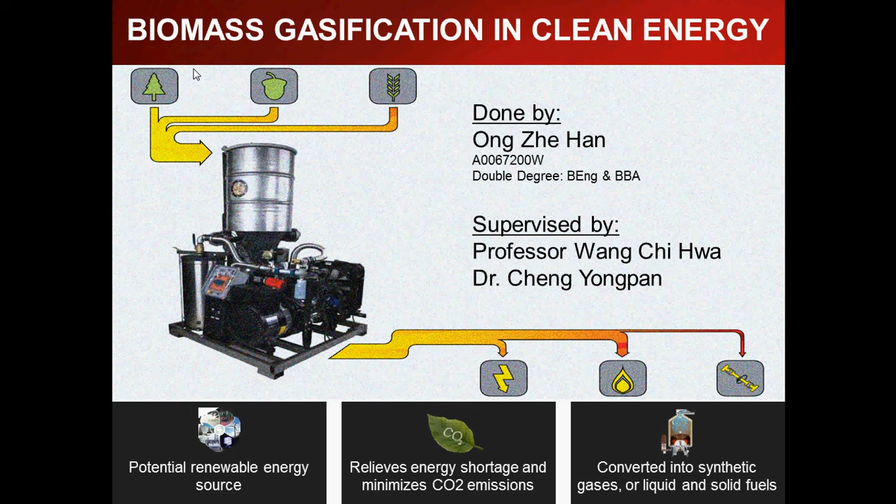I've segmented my presentation into four separate parts: the introduction, a literature review, my tentative plan, as well as an overall look at my proposed schedule for the upcoming few months.

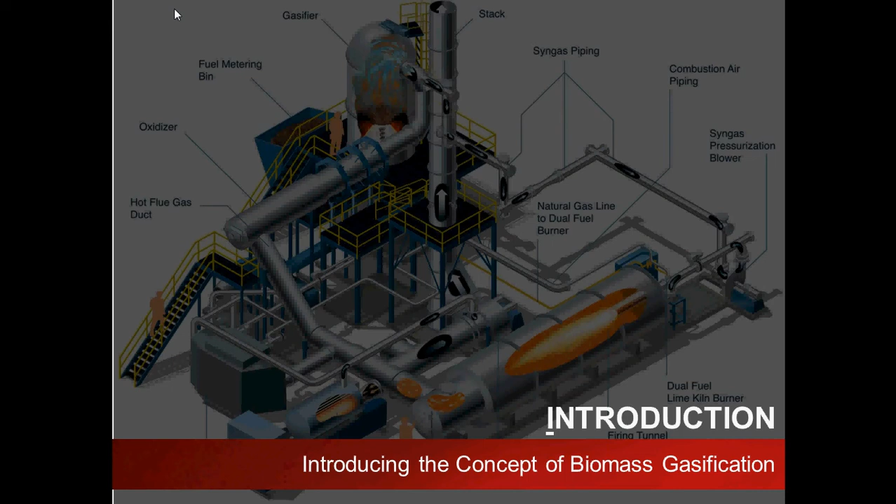Without further ado, I shall now proceed to the introduction, which will hopefully give everyone listening in an eye-opener into the concept of biomass gasification. In this introduction, I hope to answer three main questions that I think will be of great importance to anybody who comes into first contact with the concept of biomass gasification.

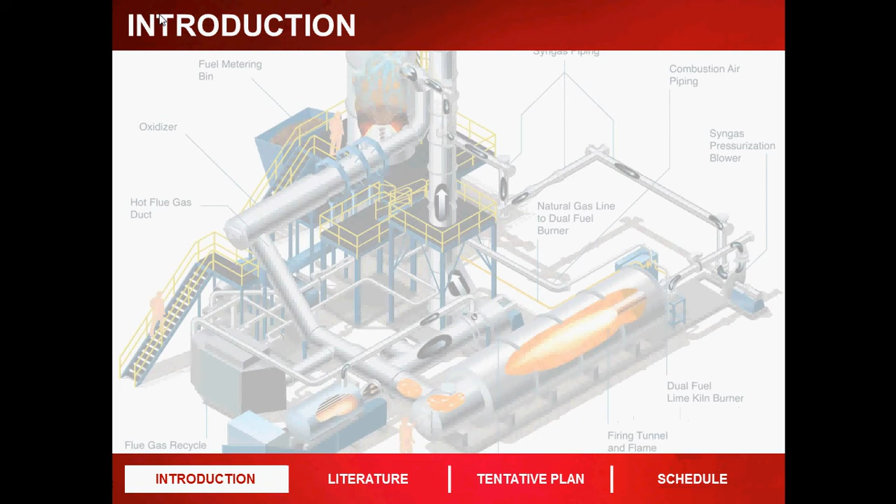Firstly, I would like to tackle the issue of what is biomass gasification. This will be followed by attempting to explain the promise that biomass gasification holds, before proceeding to give a short introduction of how biomass gasification works.

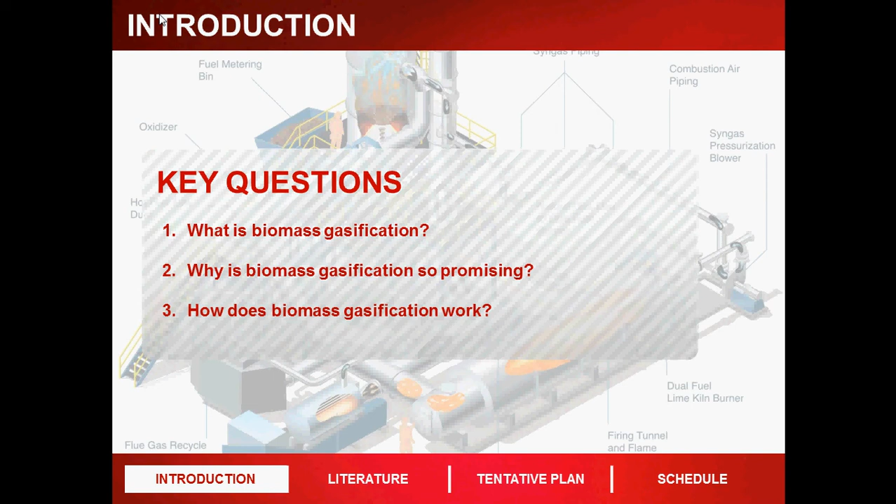So what is biomass gasification? In the hierarchy of biomass conversion processes, there exist two main conversion pathways: bioconversion as well as thermal conversion. The bioconversion, or wet process, is witnessed in natural phenomena such as digestion to produce methane, fermentation and distillation to produce ethanol, as well as extraction processes to produce rubbers and chemicals such as rubber resins.

On the other hand, thermal conversions, also known as the dry conversion process, involve four main types: liquefaction, combustion, pyrolysis, and finally gasification. Specifically, gasification is a process that converts organic or fossil-based carbonaceous materials into carbon monoxide, hydrogen, carbon dioxide, and etc. This is achieved by reacting the materials at high temperatures, often above 700 degrees Celsius, without combustion, with a controlled amount of oxygen and steam.

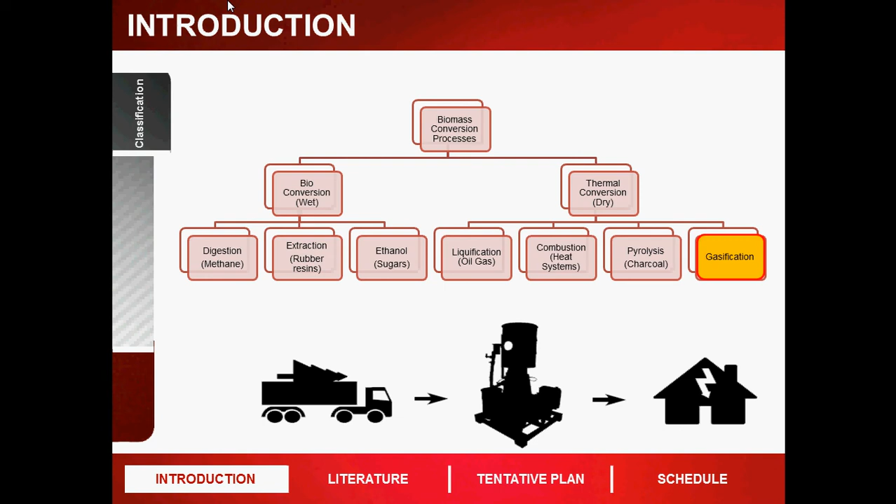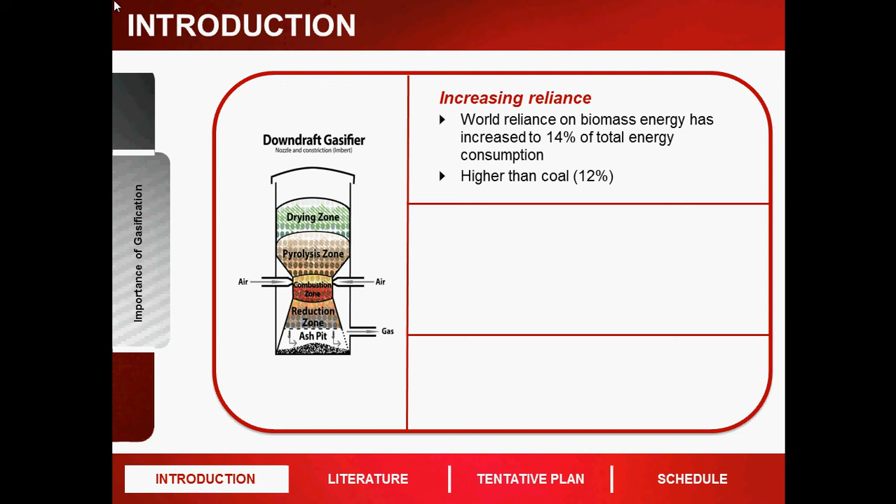Gasification has become increasingly important due to its many advantages. Firstly, much of the world has started to grow on this process that has been around for more than 1,000 years. Currently, world reliance on biomass energy has increased to 14% of total energy consumption.

Secondly, many industrialized countries are reconsidering the involvement of biomass in their energy systems due mainly to its carbon dioxide neutrality and renewable nature. Biomass energy is derived from plant sources such as wood from natural forests, waste from agriculture and forestry processes, and etc.

It's a natural process that all biomass ultimately decomposes to its molecules with the release of heat. The combustion of biomass imitates this natural process, so the energy obtained from biomass is a form of renewable energy, and it does not add carbon dioxide to the environment, in contrast to fossil fuels.

Lastly, it competes well with fossil fuels because it is renewable, and with soft energies like solar and wind on account of its energy storage capabilities.

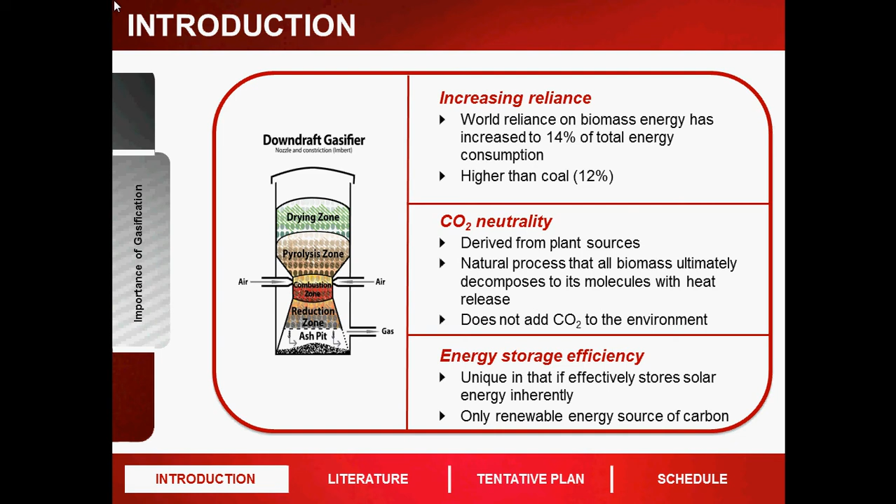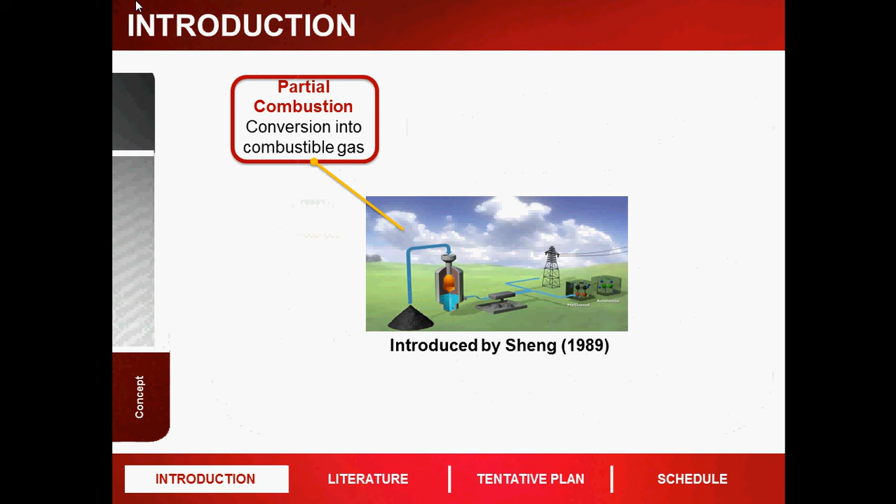Moving forward, the concept of what gasification really entails should be touched upon. Gasification is a process of conversion of solid carbonaceous fuels into combustible gas by partial combustion. The resulting gas, known as producer gas, is a mixture of carbon monoxide, hydrogen, methane, carbon dioxide, and nitrogen. The producer gas is more versatile in its use than the original solid biomass.

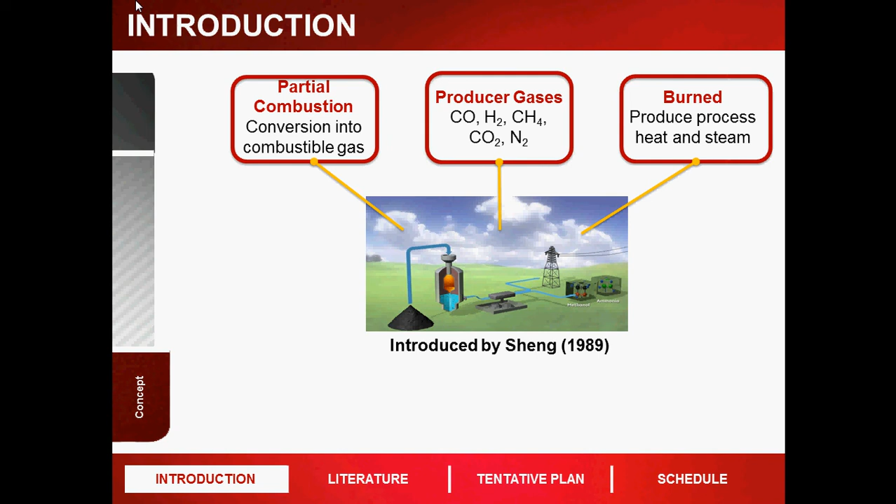It is burnt to produce heat and steam to be used in gas turbines to produce electricity. In short, this process takes in unusable or low-value wastes to produce a high calorific value gas.

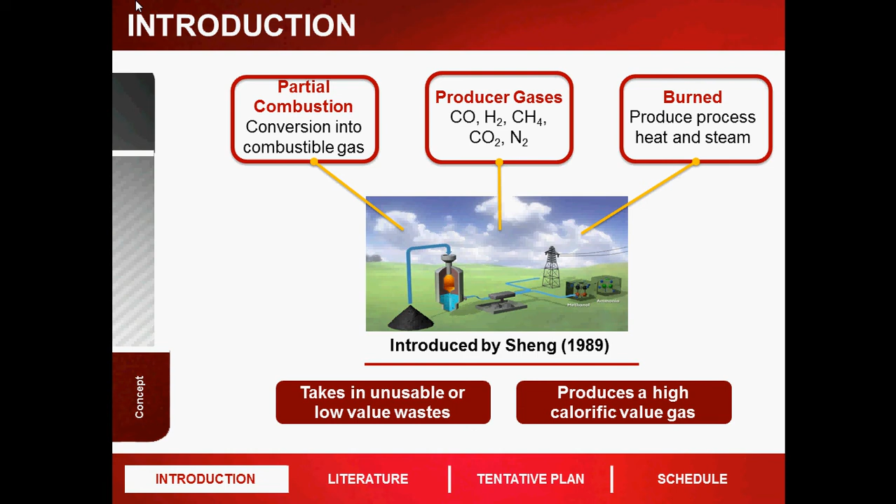In the course of this introduction, I raised at the start that we would like to answer the three questions of what, why, and how. To recap, biomass gasification is a thermochemical conversion process, a dry process that converts solid waste fuel into high calorific producer gases.

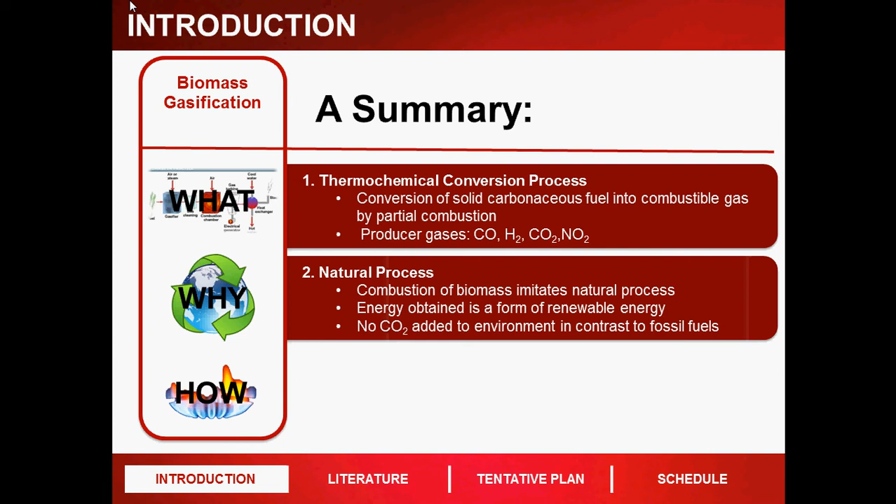It is precisely useful because of its carbon neutrality, owing to its close imitation of natural bioconversion processes. Lastly, we burn these producer gases to produce heat and steam, producing electricity through the running of gas turbines.

So moving forward, I've also conducted a literature review on the topic to gain some further insights and glean off what other respective scholars around the world have published.

To kick things off, we start by looking at the different types of gasifiers available on the market. There basically exist three types: fixed bed, fluidized bed, and entrained flow gasifier. In this study, we'll focus on the fluidized bed gasifier, which has high reaction rates and effective mixing inside, making it widely used in medium and large scale biomass gasification.

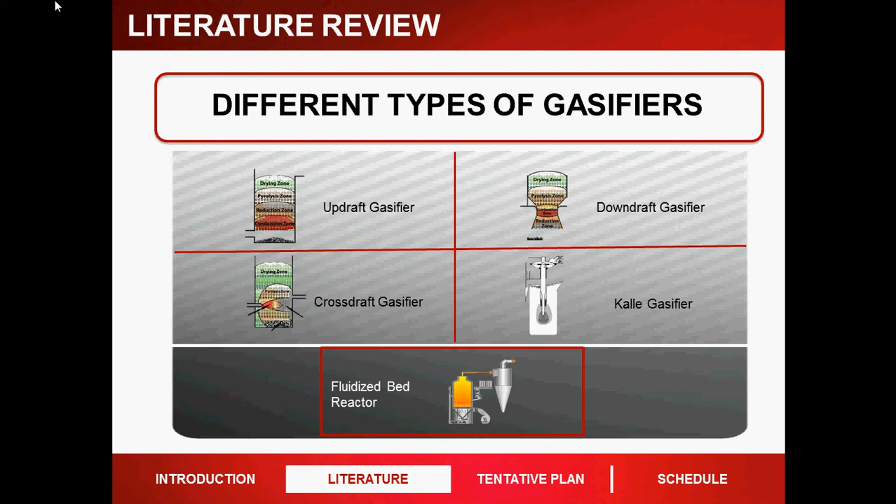Now, gasifiers have four distinct reaction zones: the drying zone, the pyrolysis zone, the combustion zone, and the reduction zone. In gasifiers, pyrolyzed gases and moisture generated in the pyrolysis and drying zones respectively flow downwards. The pyrolysis gases pass through the combustion zone, followed by a hot bed of char which is supported by a grate.

Biomass is fed to the gasifier and oxidized in this zone, where continuous air is supplied from two air nozzles. The heat generated in this combustion zone is transferred to the pyrolysis and drying zone.

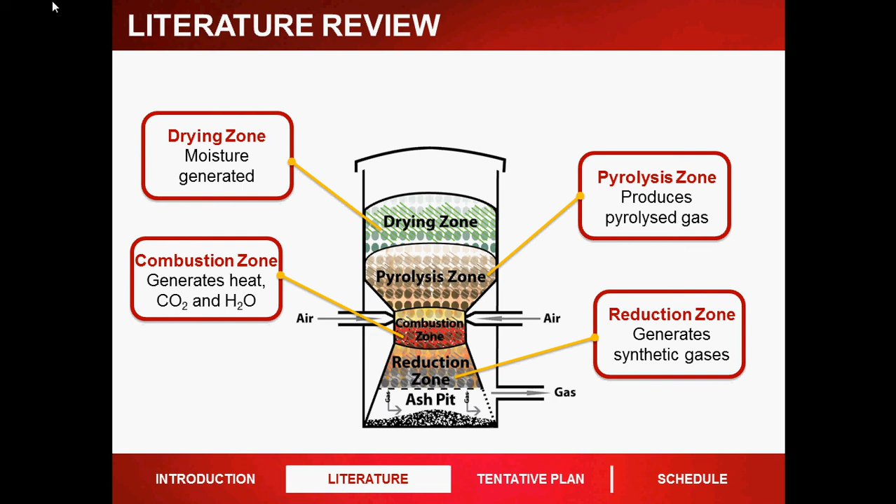Released heat from the biomass combustion process raises the temperature of the biomass particles resting above the combustion zone, and thus they get pyrolyzed. The reduction zone signifies the location of the bulk of gasification reactions, including char reduction reactions and tar cracking. Hence it controls to a great extent the yield of syngas or producer gases, which in turn define the gasification efficiency.

A look at scholarly work around the world has yielded some interesting findings. Firstly, Sheng in 1989 introduced the properties of biomass gasifiers and the gasifying reaction processes. Various fuels usually considered unusable or low-value waste, such as sawdust, wood chips, corn cobs, nutshells, rice husks, etc., were used in the biomass gasifier to produce a high calorific value gas.

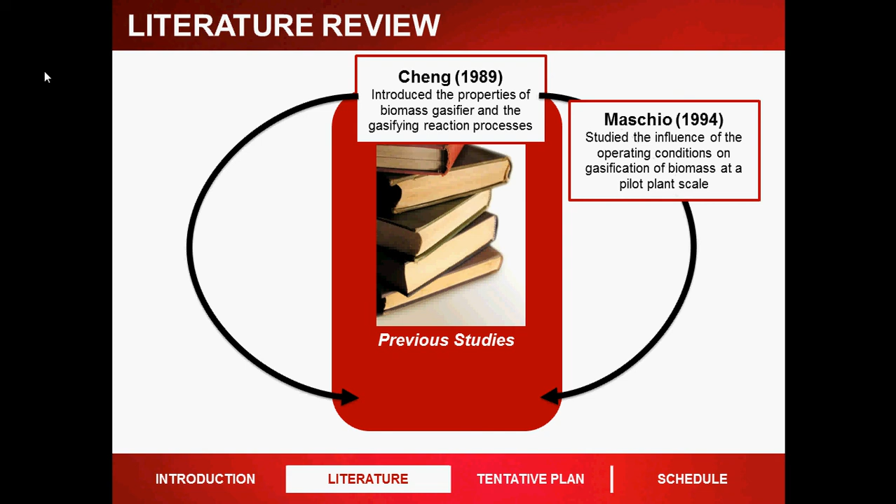Maschio et al. in 1994 studied the influence of the operating conditions of gasification of biomass at a pilot plant scale. This was quickly followed by Jorapur and Rajvanshi in 1995, who developed a gasifier running on chopped sugarcane leaves. In 2002, Zainal performed experimental studies on the downdraft gasification using wood chips and charcoal in order to assess the potential of sawdust as a biomass material.

Wander et al., in his study, used a fixed bed, downdraft, stratified and open top gasifier to see whether the potential of sawdust as a biomass material was feasible.

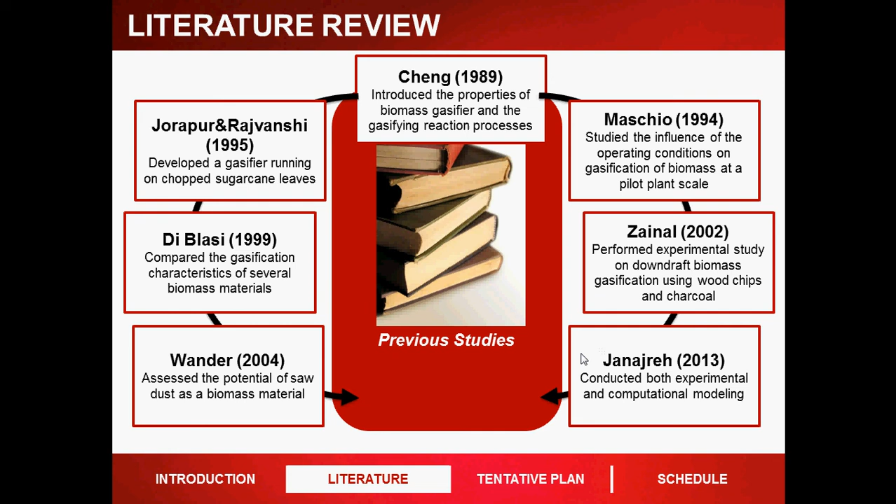In more recent and similar experiments, Janajreh conducted an experimental investigation of the temperature field inside the gasifier, followed by a high-fidelity numerical simulation using computational fluid dynamics to model the Lagrangian particle-coupled evolution. The temperature distribution and evolution of species are computed and compared with experimental results and with the ideal equilibrium zero-dimensional case. At present, our study focuses on a Eulerian method to study the carbon dioxide gasification of biomass in a fluidized bed gasifier.

So with respect to the study of the degradation of biomass via heterogeneous reactions, we will utilize the four heterogeneous reaction equations of char, together with the rate equations and kinetic parameters, as a starting point.

Now, having reviewed what exists in literature, a tentative plan has been scheduled to allow everyone to understand what I see going forward for the semester to come. With my understanding of things, Dr. Chung has been heavily engaged in an ongoing experiment using All Power Labs biomass gasifiers. This translates into myself having to prepare for exposure to working in a real-life laboratory environment in order to procure and analyze experimental data. Dr. Chung has also informed me of my task of developing a program for mathematical simulation.

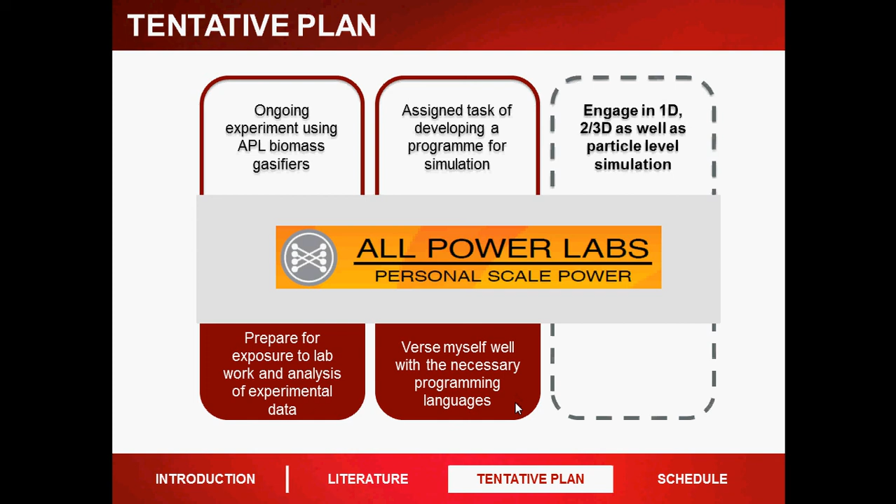This means getting myself familiarized with the necessary programming languages required to engage in existing Eulerian methods to study the carbon dioxide gasification of biomass in a fluidized bed gasifier, as well as more detailed models such as the Euler-Euler and Euler-Lagrange models for more fundamental investigations of the fully coupled chemical and fluid mechanical aspects of the fluidized beds.